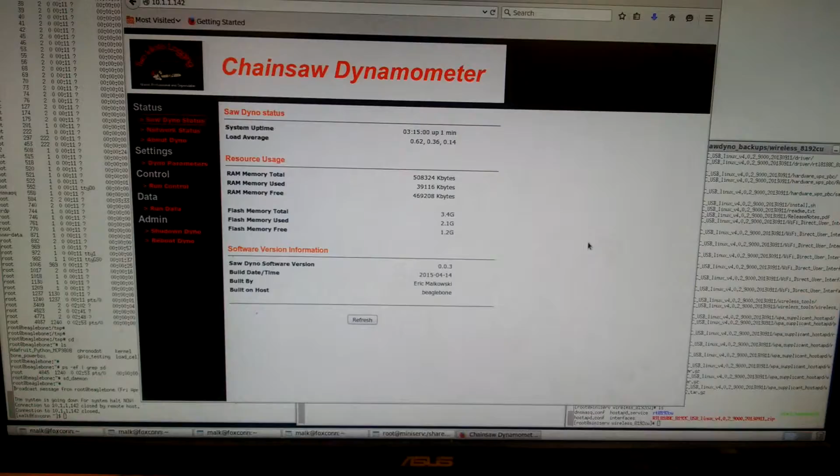Just a quick update on dyno progress here. So I got the graphing working on the web browser, and I found a really cool, really nice graph capability, and I want to show it to you. I'm pretty psyched with the way it came out.

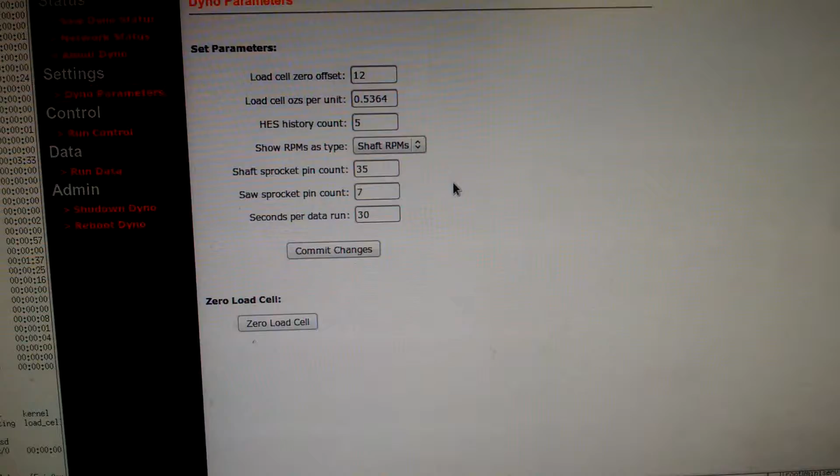So all right, let's do a run. So first of all, my phone sucks for looking at this, so sorry about that. But the parameters are there now. I don't know if you can see this, but we get the load cell offset, the zero offset, ounces per unit, HES history count. You can choose shaft RPMs or saw RPMs.

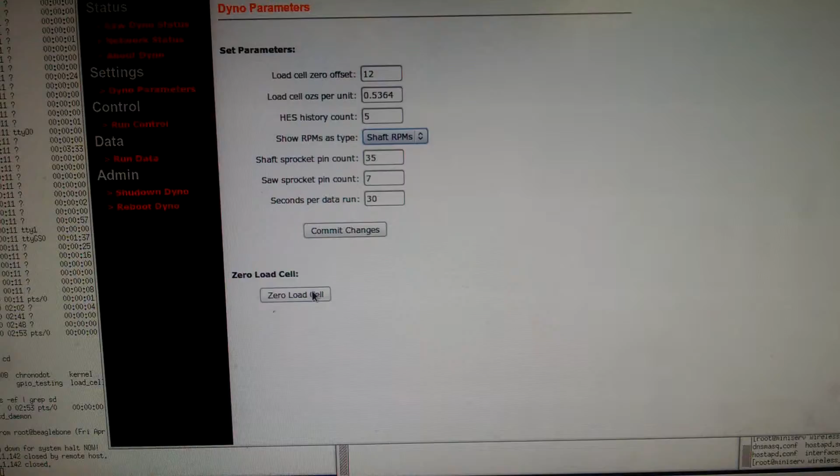I'm going to do shaft RPMs for this, and then shaft sprocket pin count, saw sprocket pin count, and seconds per run, set for a 30-second run, and you can just commit the changes. Zero the load cell is available here now too. That all works. Under run control, this is data that was on there before. I'm going to do start data run.

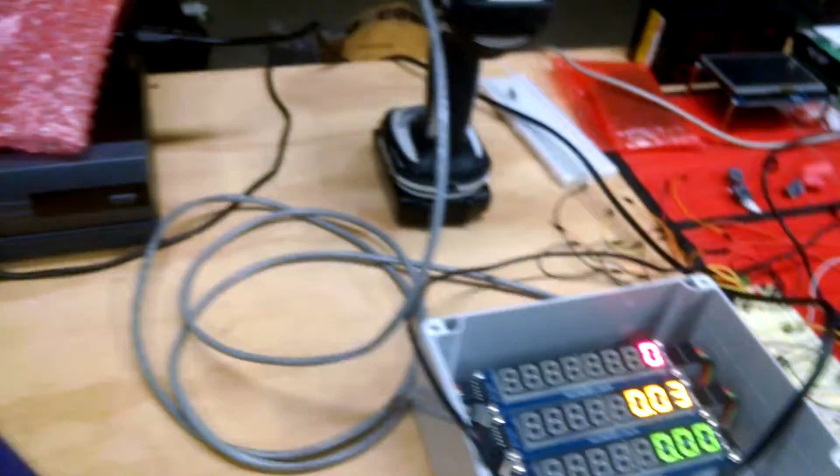I'm going to go over to here, so you can see there goes the countdown. I'm going to try to do this the best I can. Load cell's going, so we'll start the drill, put some load on the load cell, crank it up, 1200, 6 foot-pounds of torque, drop the RPMs down a little bit, drop the torque down, bring it up,

down, and we're almost done with our run. Let's just let it run out. Alright, so that goes out like that. So I'll come over here, and we just refresh this, and the run's done, and we click graph, and boom, there's a graph right there.

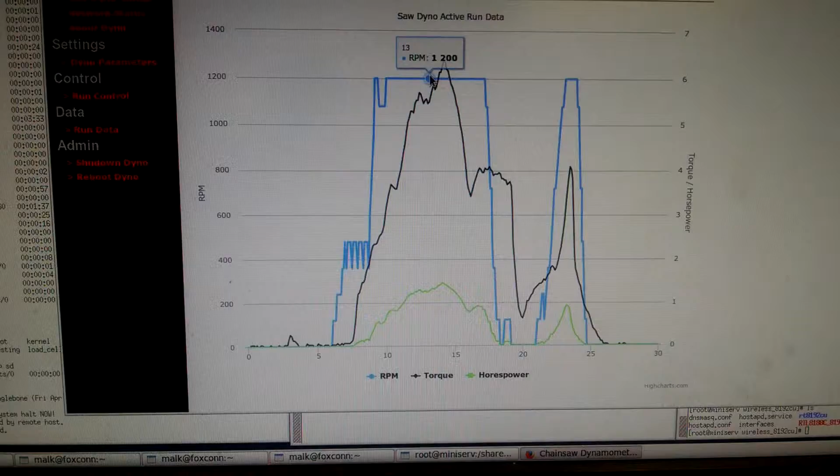So you can see my peak torque was at 6.403 foot-pounds at 1200 RPMs is when I had the drill cranking. See horsepower down here. These graphs are awesome. You can turn axes off like RPM, torque. There's just horsepower. And horsepower, torque, and RPM back.

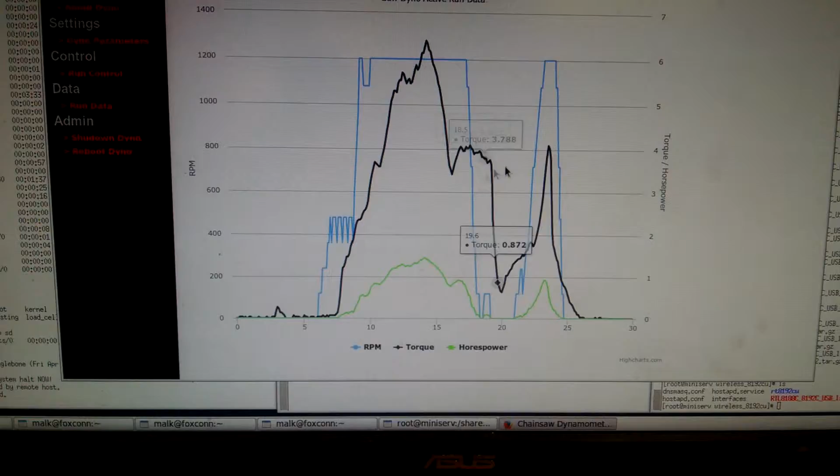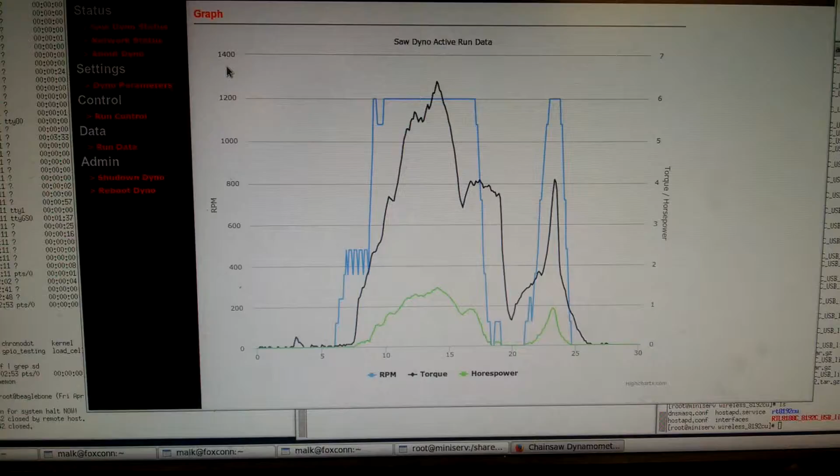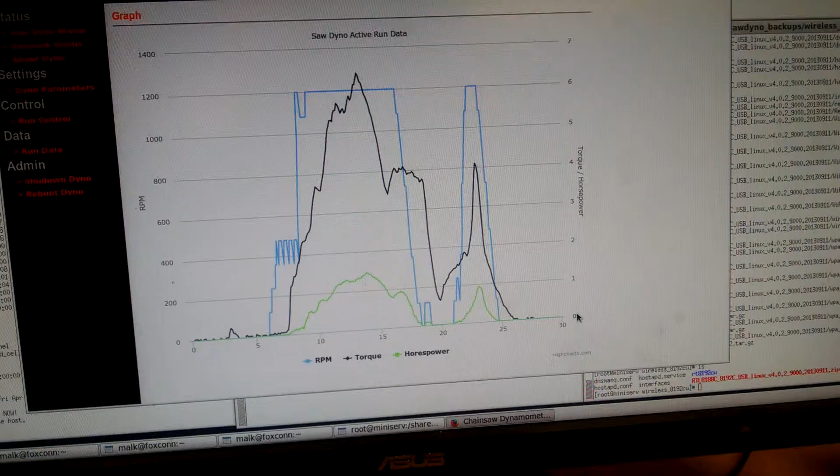And it's cool because you got the time down here from 0 to 30 seconds, and then you have the RPMs 0 to 1400. If I do saw RPMs, it would get up to like 5,000 or whatever with the 5x from the ratio of the shaft sprocket to the saw sprocket. And then the torque over here, and the horsepower on this graph from 0 to 7 on here.

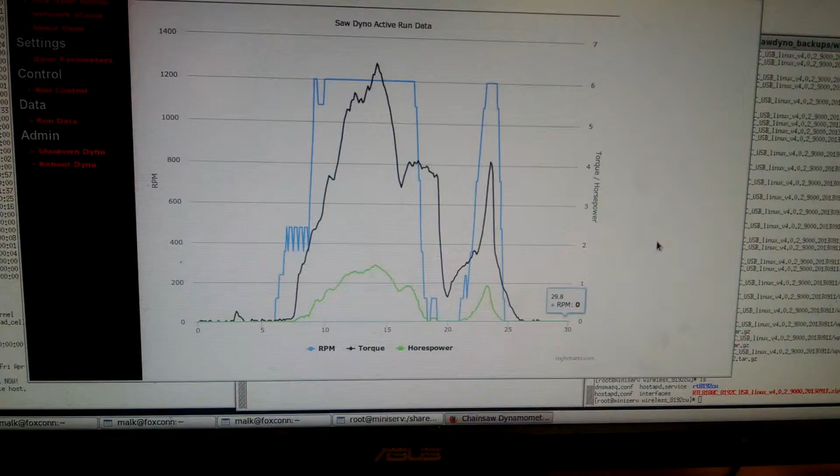I don't know if you can see this very well in the video, but that way you can really look at everything well. I don't have to scale the RPMs or anything. It'll just show it properly. So anyway, let's do one more run. I'll show you, we'll put it in saw RPM mode. So commit changes, we'll go over to run control, and we'll start a run, and there we go.

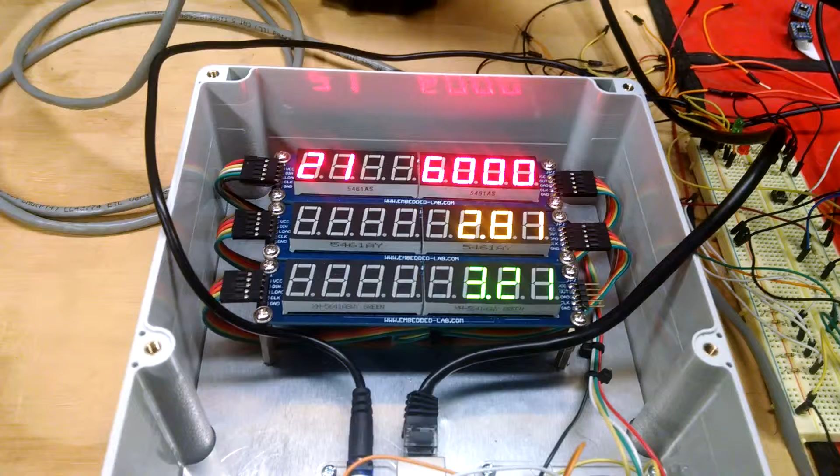We'll bring up the RPMs. You'll see the 1200, 6,000. Crank up some torque and horsepower. Drop the RPMs down. It's hard to simulate this thing without a saw, so we can go crank up the RPMs, and then we're going to basically drop it down. I can't really simulate this, but anyway, let's just get some good data here.

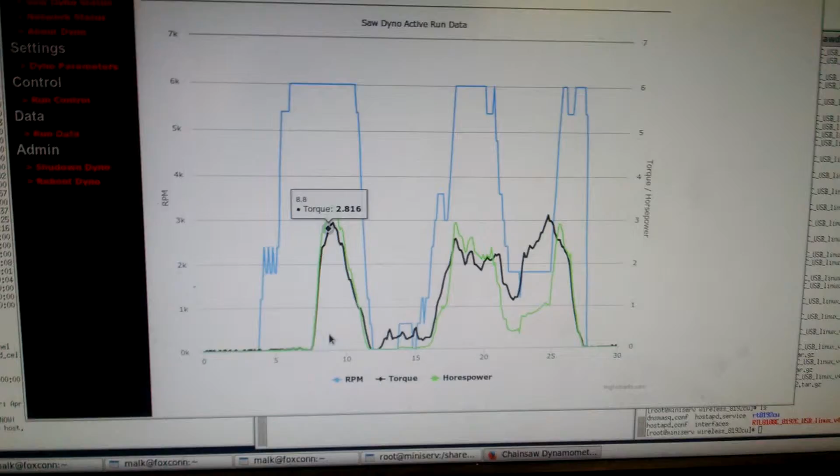All right, so let that finish, and then we come over here and we can just hit refresh, and the run's done. Graph it, and there's that. So over here it's 6,000 RPMs at the peak, and I love how you can hover over the points, and it shows you it was doing 6,000 from 6.4 seconds up to 10.6 seconds. You can see where I went up and down, and peak horsepower.

The horsepower goes higher because the higher the RPMs, the more horsepower you get. Right, so when you're up here at 6,000, the torque is actually below the horsepower, and this is a good example here where the RPM drops off to 5,400, the horsepower drops down with it. Sorry, my mouse is going all over the place here, but pretty cool.

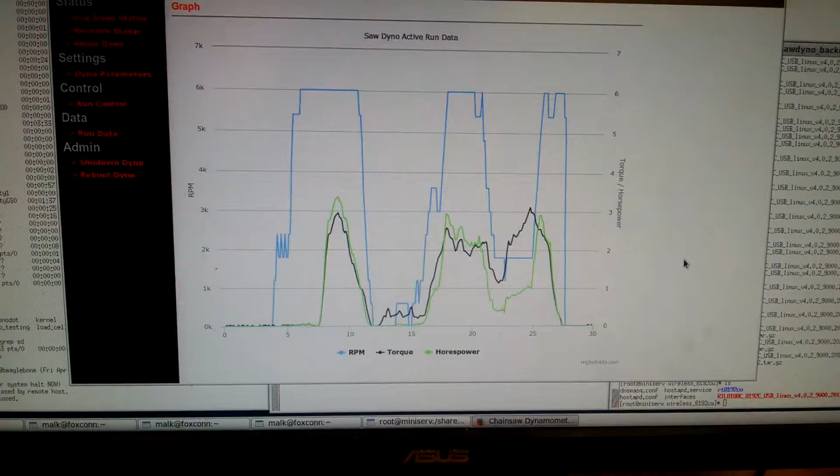So yeah, that was the feature I wanted to show you guys, and shutdown and reboot all work now. I got to do the run data screen. I'm going to have it so that it allows you to copy the active run data to a saved data set, so you can name what saw it is, and put as many saws of data as you want in here, and you can graph each of those, and you'll be able to click the graphs and download the data.

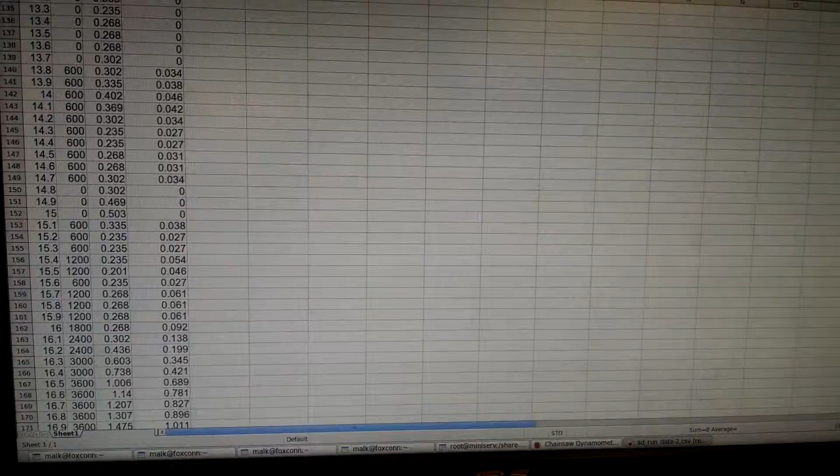Like I can download this right now, and I can open it right inside my Excel equivalent on here, so that's pretty cool. There's the data in a pseudo Excel. This is Open Office. So time, RPM, torque, horsepower. You can use the graphing feature on here, which is a lot more tedious. It's really nice to be able to just hit graph. It just shows up right in the browser. Pretty sweet.

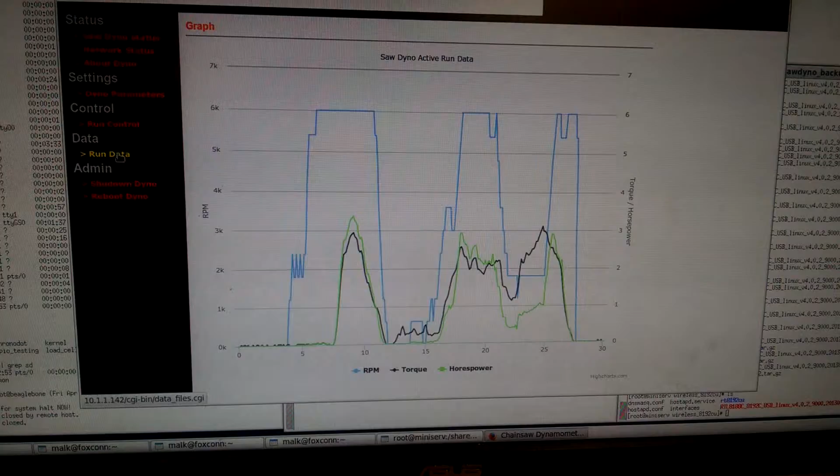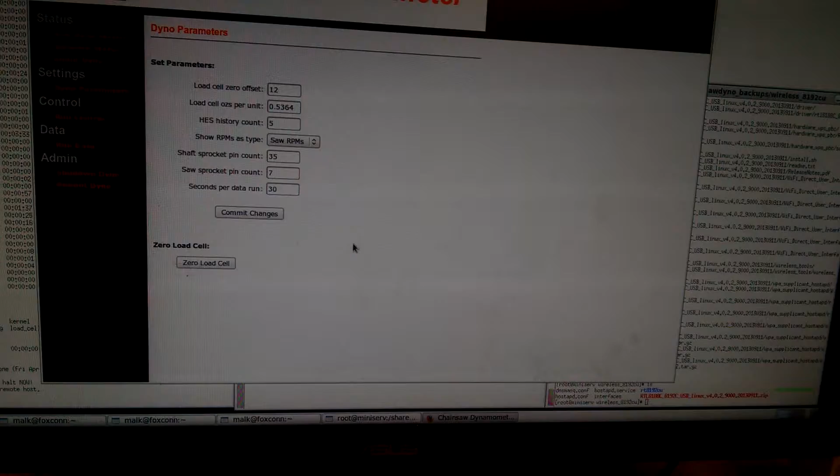So anyway, Bill, if you've managed to listen this far into the video, we could probably definitely get together on Sunday to try this thing out for real. And I'm hoping that the noise issues are at bay enough on the Hall effect sensor that it'll work well. If not, I got one of the guys at my work that's willing to help me with electrically trying to isolate that. But that's really the biggest issue right now that could hold us up from being able to really use this thing.